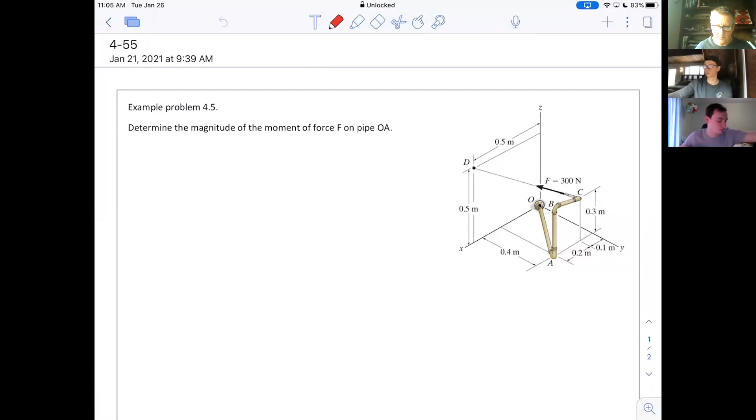So let's take a look at this, and you will see a question like this on the test. We are one week away from our first test, and I'd say this is the most practical example. I had to make this problem up myself because I didn't think there was a good one in the book.

Notice this time it's asking to determine the magnitude of the moment of the force F on pipe OA. Can you see pipe OA is attached to the wall through that floor flange? When you rotate that, it's going to cause the pipe to want to untwist, lefty loosey. You can tell the arrow's pointing left, it's going to want to unloosen it. So this time it's not the moment around a point, around point A, it's around axis OA.

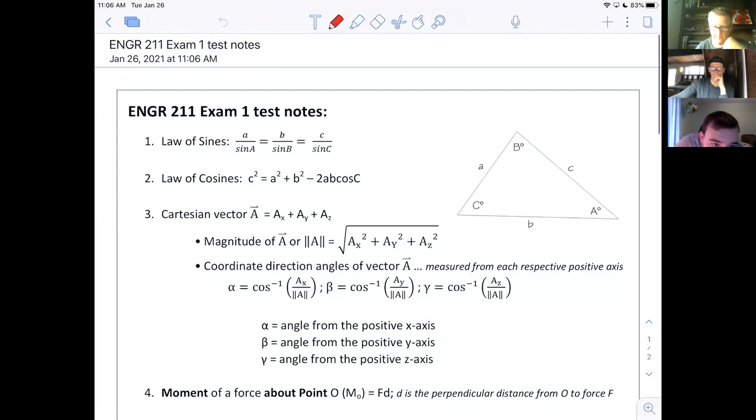Number 5 there, moment of a force around a point, that was the 4.4 assignment. But number 6 here, which is the last thing you need to know, is moment of a force around an axis. Notice the difference if you just stare at this matrix that we're taking the determinant of versus this one. What's the difference between those two matrices?

Notice the R's are the distances, unchanged, the forces are unchanged, force of X, force of Y, force of Z. The only difference is up here, we kept track of which axis it's rotating around, and our answer wasn't a number. If you're saying rotation around a point, you don't just get a number for an answer. You get the force around the X axis, the force around the Y axis, and the force around the Z axis separately.

But when you go around an axis, the only thing you're adding is these U's up here, that's the unit vector. That's actually the lengths of axis A, in other words, the unit lengths of axis A. I'll show you what I mean by that in just a second.

So what you're multiplying by this time is not just an i that keeps track of, hey, this is the one around the X axis. You're actually multiplying by a number, by a number, by a number. And notice it's still plus, minus, plus, you're still taking a determinant if you wanted to memorize this. But you're actually going to get a numerical answer, in other words, how badly does that pipe want to unrotate.

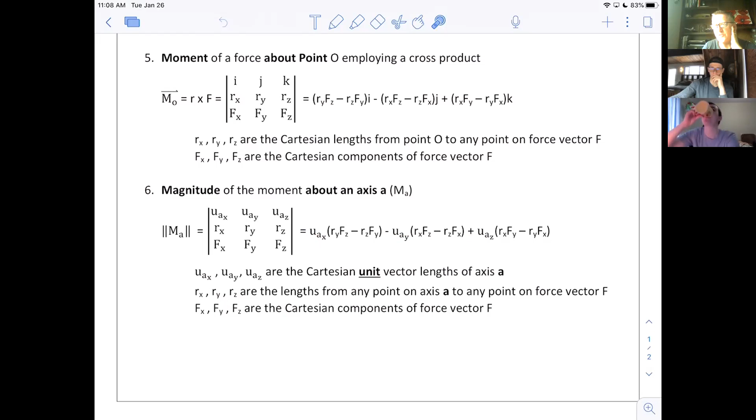So we're going to be staring at that formula. Now I've got to make that go away. So let's see if we can figure that out for this particular example.

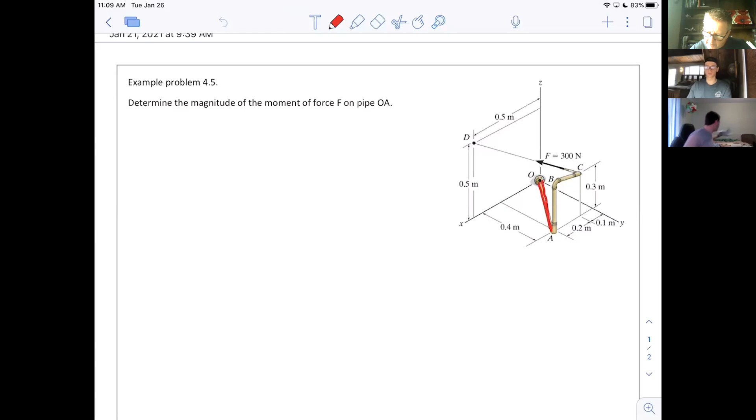So let's take a look at this axis right here. I'll color it red because we're rotating around that axis. Let's see, where is that axis? Notice it's 0.1 and 0.2 in the X direction, so it's kind of 0.3 over here in the X direction, and then it's 0.4 in the Y direction. Notice it's laying in the XY plane, so its Z is 0, there is nothing there. It's 0.3 and 0.4.

Now, in that formula I just showed you, if we multiplied by 0.3 and by 0.4, does it make sense that would actually change the size of the force? Those aren't forces, those are lengths. The reason we're converting that to a unit vector is because the length of a unit vector is 1. And therefore, when you multiply by 1, you don't change something. That's the logic as to why you're multiplying by a unit vector. And the lengths will tell us what that is.

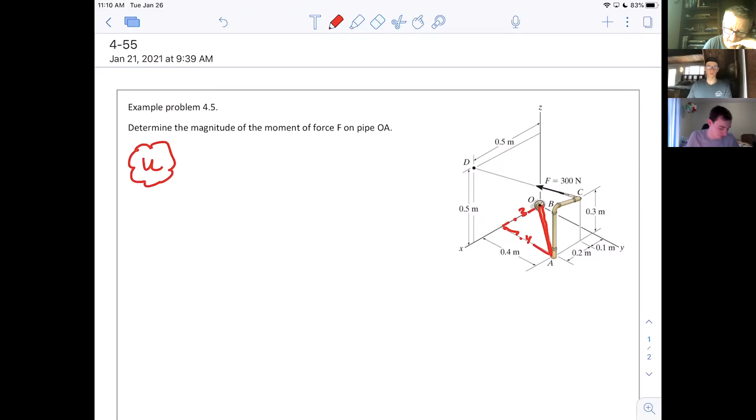So with respect to U, describing the axis of rotation. And again, please interrupt when you have questions.

Interrupt, I said. In the X direction, it's positive 0.3. And in the Y direction, that's also positive 0.4. Wait a second, how do I know that that's positive or negative? I actually got to think about that a little bit.

I'm going from O to A. I'm just trying to think, does that matter? I don't think it does. And then because it's laying in the XY plane, there's no Z at all. It's kind of flat, down there in the XY axis. Are you good with that? Does that make sense?

So if I do the Pythagorean theorem in 3D on this to see what the hypotenuse is, then of course I'm taking 0.3 squared plus 0.4 squared plus 0 squared. So I'm just sort of happy, in a sense I don't have to think of this as 3D, it's in 2D. And you may remember 3, 4, 5 is a right triangle. So this actually comes out 0.5.

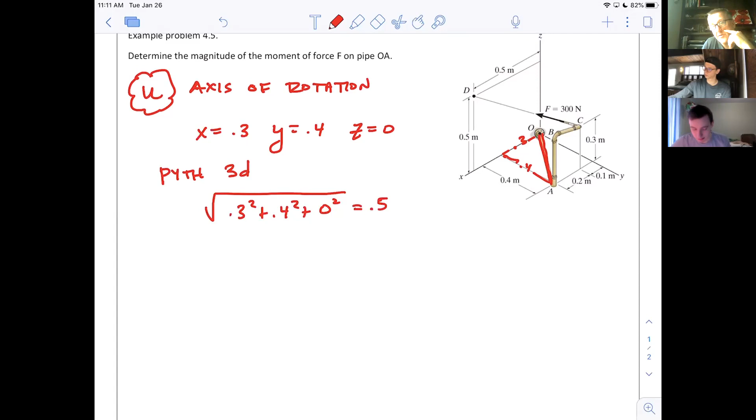So that pipe length is 0.5 meters, half of a meter long. So as I said, I wouldn't have had to do this in 3D. I just wanted to write it in 3D so you understood if there was a Z, then fine, I'll do it that way. So that means then U as a unit vector is really...

I guess I better write it this way. U of X then is 0.3 out of 0.5. We're always doing that, right? It's the X divided by the hypotenuse. In other words, that's 3/5 or 0.6, just to get rid of the decimals. So my unit vector is 3/5. And of course, my Y would be the unit in the Y direction, 0.4 divided by 0.5, which is 4/5.

And since there was no Z, there is no Z. So this is my unit vector. Now we're multiplying, we're doing the same thing we did to find the force around a point, but we're multiplying by these terms, not X, Y, and Z, or I, J, and K, like the other formula. We're multiplying this by 3/5 and 4/5.

Now, collectively, does it make sense the magnitude of that unit vector is 1? That's why we did this. So by multiplying by 1, we're effectively not changing the force. If the force is 10 pounds or whatever, or the moment is 10 foot-pounds, we don't want to multiply by 6 and make it 60. We want to multiply something that doesn't change its actual size. And so what we're really doing is taking that force and multiplying it by numbers this time instead of just by I, J, and K. That's the only difference.

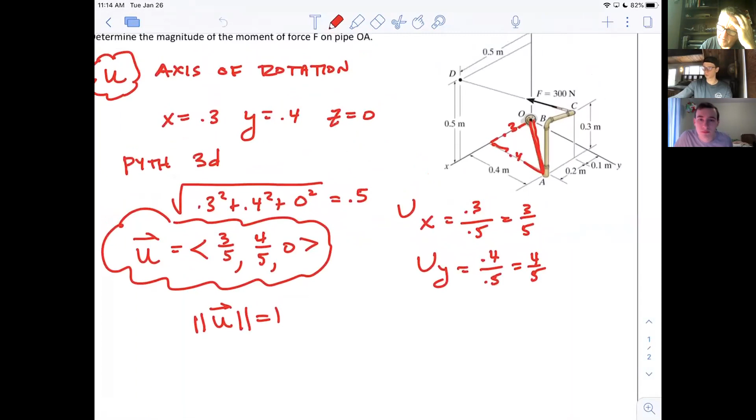So how far is it from the bar OA to that force? Would you agree that there's two places on the force that I know where I am? I know where I am at C, but notice it's also pointing at D. So I could go from O to D. I could go from O to C. I could go from A to D or A to C. Any of those would be okay according to that note. Do you agree with that?

The question is how far, all I'm really doing here is how far is it from the axis to the force?

I'm going to say O to D. Notice it's O to D, not D to O, because if you screw that up, you get the signs backwards. So O to D would work, O to C would work, A to D would work, and A to C would work, apparently.

My note sheet was very careful to say any point on OA up to any point on that force. I know a lot here, so I have all these choices. Now we could stop and think about which one's the easiest, that'd be fine. For no good reason, I'm just going to choose A to C.

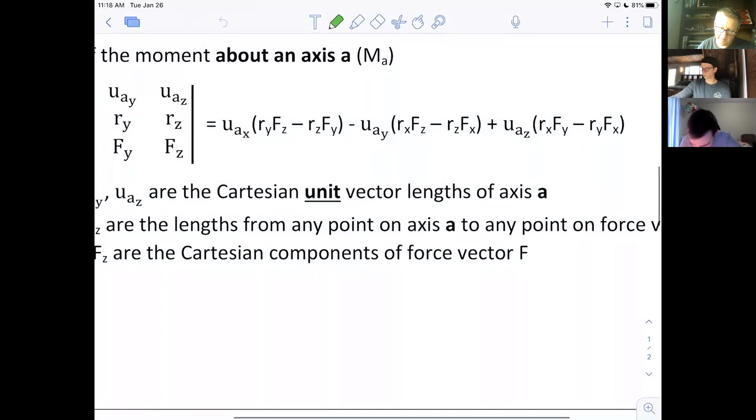Lastly, I've got to get all my forces. Let me see, how did that work again? Forces. Oh, darn. Force in the X direction, force in the Y, and force in the Z. I got to break that up myself. Cartesian components of the force. Dang.

Why do I say dang? Because in this problem, I was given 300 newtons of force, but that's not in its components. That's just pointing off in space somewhere. And so I got to break that up into its component parts. And I'm going to do that using, again, kind of the unit vector concept, a proportion.

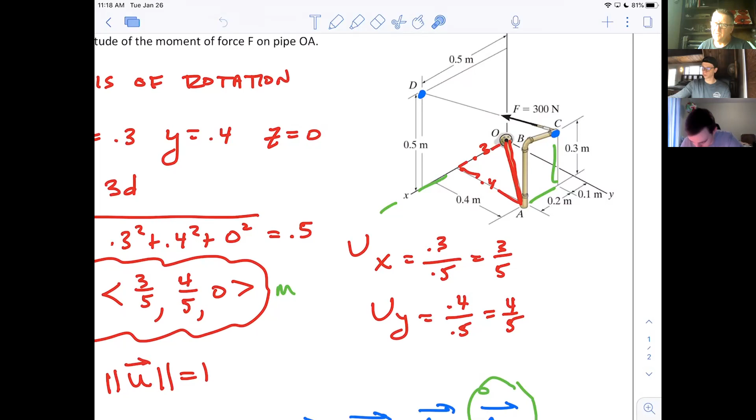So make sure you understand that force is pointing from C to D. Those dots that I made on there that were blue, very important. The force starts at C and it aims at D. And so what we got to do is come up with all the distances. How do you get from C to D? And that's not obvious, right? I mean, I got to stare at this a little bit.

This is a harder one. You got to stare at the picture. And again, you got to stay parallel to the axes. How do I get from C to D? Well, switch colors. Look at the forces.

Well, let's see, how far is it in the X? So I'm staring at very particular things right now. I'm looking at X. I'm looking for, parallel to that axis, what measurements do I have that are parallel to that axis? I'm tempted to say 0.2, but does it make sense that if I go across, that C is not 0.2 away? What do you gotta see? Somebody help us out here. What dimensions are you looking at that tell you how far this is in the X?

I find this tricky. Well, you can see that there's 0.5 meters in the X back there. So you can subtract what you see over there from what's over there. That's exactly right. So I'm at C. Where is C? C is at 0.1 meters. So you're 0.1 meters in already to C, but D is at 0.5. So you're a total of 0.4.

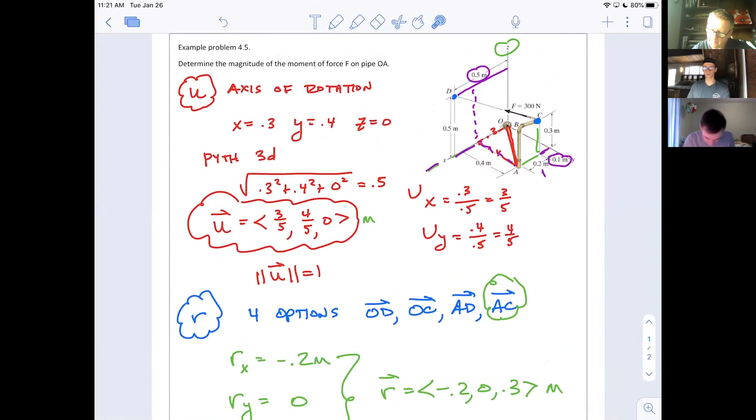Again, you got to stare at this figure a while. You got to stare at anything that's parallel to the Y axis. There's 0.4, that's parallel to the Y axis. That's the only one I see. Well, that's actually good news. It's 0.4. That's how far it is. Okay, great. It's 0.4 in the Y direction.

Is that positive or negative? Well, because it's going from C to D, that's backwards from Y. So that's negative.

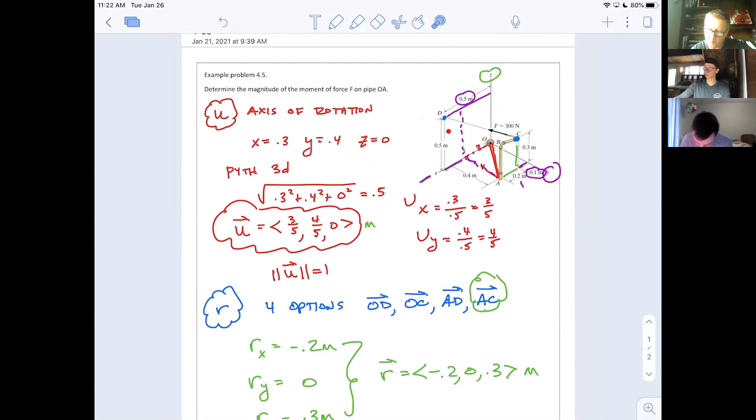And finally, Z. What is it in Z? Again, I'm looking parallel to Z. There's a 0.3 there, there's a 0.5 there. Hey, that's the only ones, 0.3 and 0.5. Well, if D is 0.5 up and C is 0.3 up, then that means the difference of those is 0.2. So it's 0.2 up. So that's positive.

Do you agree with that?

So we're using a proportion to get this. Or you might think of it as a unit vector. I've been kind of using the proportion idea. It's the same thing, but I'm going to do it as a unit vector this time. So then what is the magnitude of CD?

Well, I've got to square all of those and square root them. Notice I left the negative for Y out just because I'm afraid if I type in negative 0.4 squared, I'm going to get it wrong. So 0.4 squared plus 0.4 squared plus 0.2 squared. I got 0.36. Wow, thank you, book problem. 0.36, when I square root that, I actually get 0.6.

So that means the unit vector of CD could be written as 0.4 divided by 0.6, which would be better to write as 4/6 or even 2/3, which I'll switch in just a minute. And then I got to be careful not to lose the negative for this one, negative 0.4 over 0.6, and 0.2 over 0.6. So better would be unit vector for CD. And maybe I should be writing that over the U. Let's see, that'd be 2/3. This is negative 2/3, and this is 1/3.

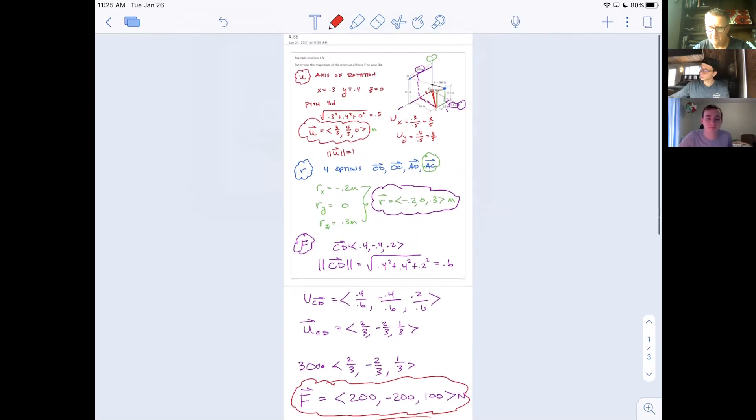I should get my 300 back. I mean, the actual force is 300, but I just broke it into its X, Y, and Z components. And so that's what the unit vector or those proportions are doing for you, is figuring out what percentage or what proportion of that 300 is going in each direction.

And I'm using the lengths that define the direction it's aiming to help me do that. So that's why unit vectors are cool, because effectively what you're doing is multiplying 300 by 1. So you're not changing the 300. You're just partitioning it out to how much in X, how much in Y, and how much in Z.

And so my first thought was, wait, that's going to add up to way more than 300. But then I forgot, oh, that's right, we got to square root it. So that's 400 plus 100, 4,000 or whatever, but oh yeah, that'd be 9. The square root of 9 is 3. Okay, yeah, that does work.

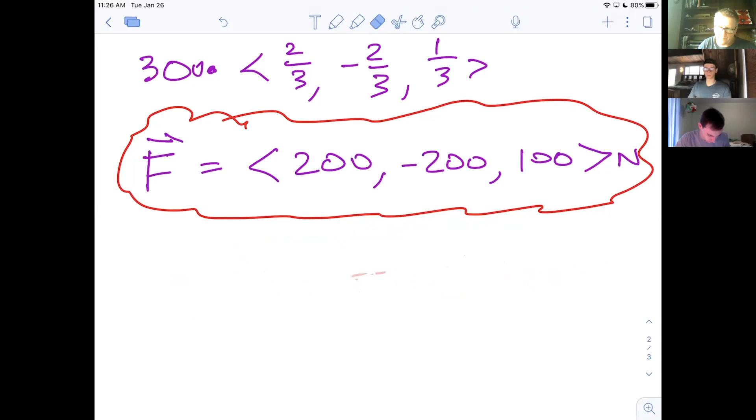So there's all my ingredients. Wow, this is time consuming. So then I can say, according to my note sheet, which I don't want to flip to, but I do want to look at, where are you?

How do I write this? Well, I'm trying to find the moment. What am I trying to find here? The moment, get bigger.

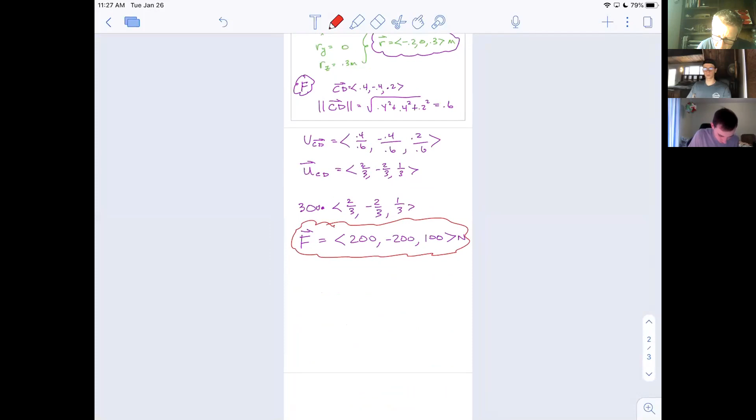The magnitude of the moment around pipe OA, or axis OA. So I'm going to write that as the magnitude of the moment around OA. It's not the magnitude around O, that would be the rotation around a point. It's around an axis, and I define the axis by those two endpoints. That's how you, in geometry, say it's like segment OA.

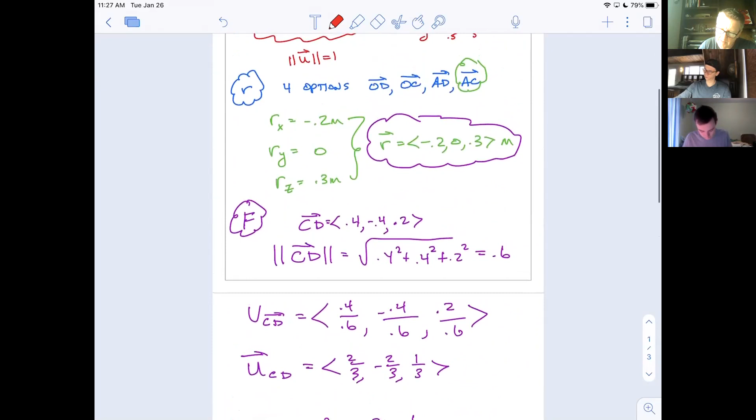And then my large and intimidating matrix is to rewrite all of those radiuses, which were 3/5, 4/5, and 0. And then all my distances, how far the axis is away from the force: negative 0.2, 0, and 0.3. And then all my forces: 200, negative 200, and 100. And then take the determinant of that matrix, and that's going to produce a number.

Now, can you at least picture what this is accomplishing? You're taking the force of 200 in the X direction, and multiplying it by how far that force is perpendicular away from our axis. All this is forces times distances. That's all it is, just a bunch of them - there's a ton of them. That's the problem.

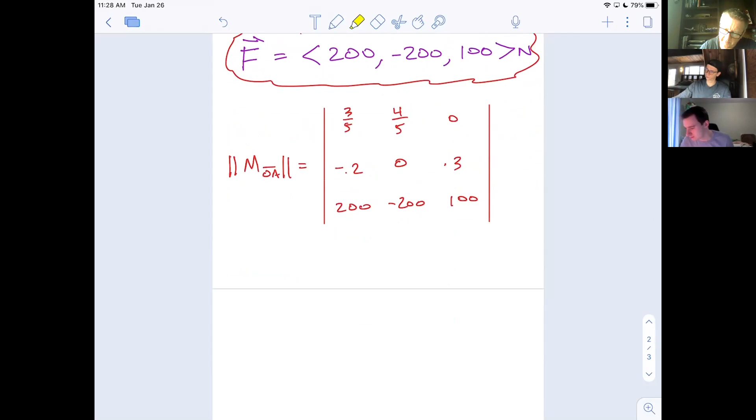So let's use our mnemonic device. I'm taking this row and this column out, which means I'm taking 3/5 this time, times the diagonal multiplication, 0, always minus, and then 0.3 times negative 200. Notice how easy it would be to screw up the signs there. It's actually minus a minus, so that's going to be a plus. That takes care of that one.

Next, 4/5. What's important to remember about the 4/5? That's on my note sheet, but if you're memorizing this, what's important about the 4/5? Negative - you change the sign of it. Again, I'm coming back and crossing out this row and this column this time. So that leaves 4/5 times...

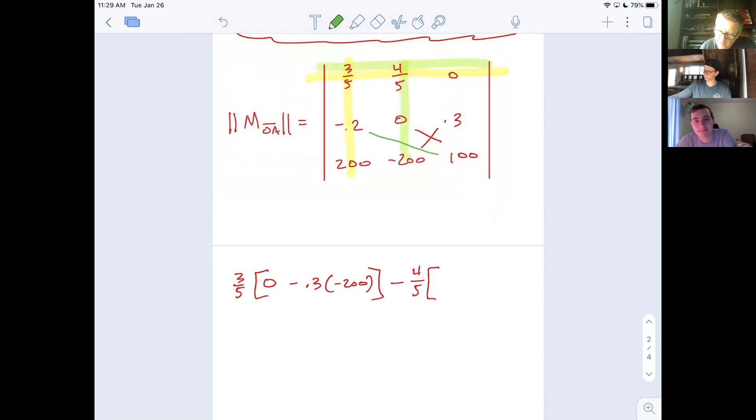Let's switch colors just because this is going to get confusing. So I'm multiplying negative 0.2 times 100. It's always minus, and then 0.3 times 200. And then back to plus, and then, oh, cool, force Z is 0. So I don't care what's sitting in there. That'll save me some time.

So just to make sure I don't screw up, I'm going to go a little slower. Let's see, 0.3 times 200, that's a negative, and a negative, that's a positive, so that'd be 60. And then minus 4/5 times - this is a little worse, I'll type everything in so I don't screw it up - negative 0.2 times 100. I know I can do that in my head. Minus 0.3 times 200. I got negative 80 for that. But I'm also staring at my calculator to make sure I actually typed what it said. It looks like I did, negative.

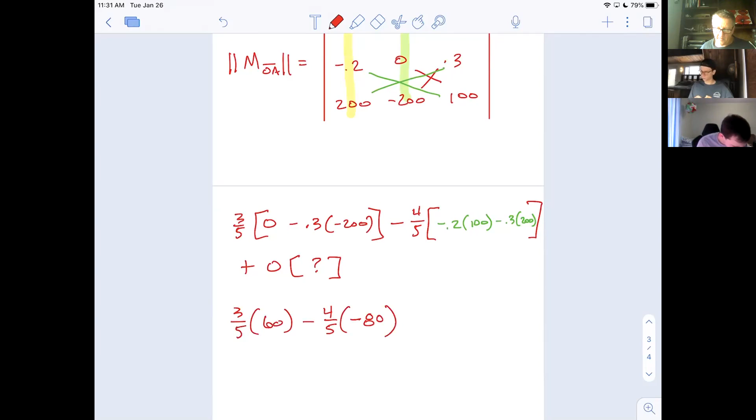So now I can actually multiply that out and answer it. I'll do this in my head. 60 divided by 5 is 12. 3 times 12 is 36. 80 divided by 5 is 14. 14 times 4 is 56. I probably shouldn't trust myself. That's 16 - it's a good thing I didn't trust myself. 80 divided by 5 is 16. Times 4 is 64.

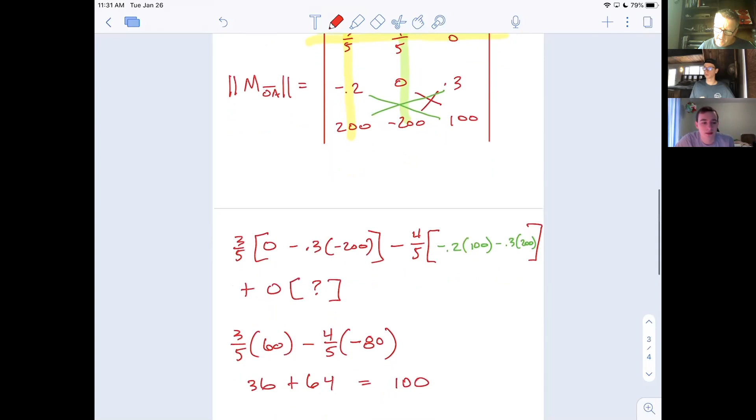So that just came out 100. What were my units? I was a little footloose and fancy free about that. What were my units? It'll be Newton meters, because our forces were newtons and our distances were meters.

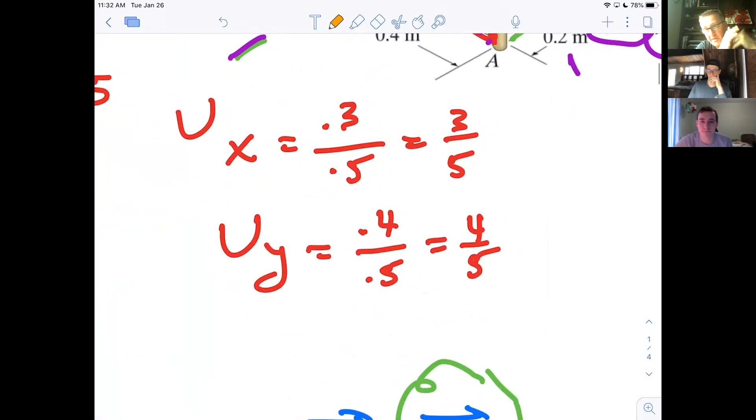Is anybody bothered by this? Isn't the unit for this row meters, and this row meters, and this row newtons? So wouldn't it be meter newtons? Well, that first row is a unit vector, right? So I think the meters cancel out there. Good job, because when you look back here, wasn't it 0.3 meters divided by 0.5 meters? So the meters actually cancel. So that top row is actually unitless - that's what a unit vector is really doing, it's cleansing it of everything.

So if you are bothered by it, no - it's really nothing times meters times newtons, so it is Newton meters if you follow the units through it. So now you can say that's how badly the pipe wants to turn. Does it make sense that now you can kind of know, is that going to turn? Is it not going to turn? Is that enough force?

You see how you've got to lean on that mnemonic device to get this right? Three dimensions, this is really one of the biggest things you need to be able to do, because it's hard. Real life is in three dimensions, and you've got to know the resultant. I think the end of this chapter will really help this all come together for you.

We don't have to learn anything new from now on. We're just applying this to interesting questions. So that's the good news. You're done, the note sheet is ended. There's nothing else for me to teach you. We just get to apply and practice and strengthen our grasp of this.

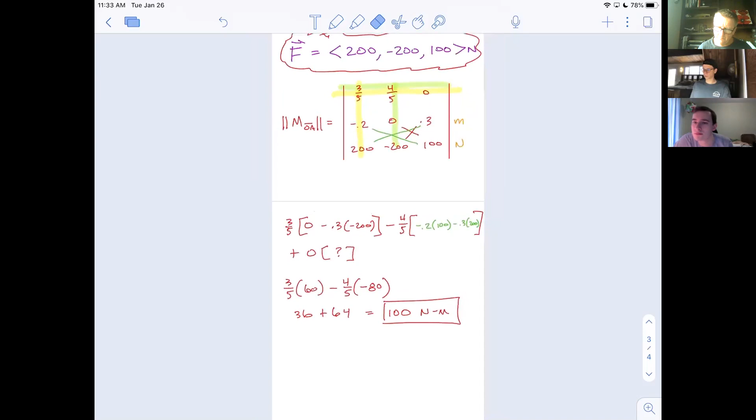Anything bugging you about that before we go on? Really? No?

Let me just quickly show you where we are going from here, with a couple of cool pictures that I stole off the internet from somewhere, that I think illustrate what's going on here.

Check out these cool home designs. I'll just stick with that top one right there. Isn't that cool? Like, wow, that's awesome, man. Would you like to live in something like that? They've got this front porch out there that sticks out, so you can stand out there, and it's obviously up in the mountains and you're over the top of something.

But can you see what we've been talking about here? They've got this whole building cantilevered out. Can you see that it wants to do two things? It wants to fall because of gravity, and you can see the pipes are there pushing up to counteract that. So the force down is counteracted with the pipes pushing up, so it isn't moving. Good job, engineer. Statics — you made it not move.

But the building is also attached back here. Does it make sense? It also wants to rotate — it wants to sort of cave in this way. So I've got to track both of those things. In this picture right here, can you tell that the building wants to rotate along that axis right there, that axis of concrete that's holding it up? That's what it wants to rotate around.

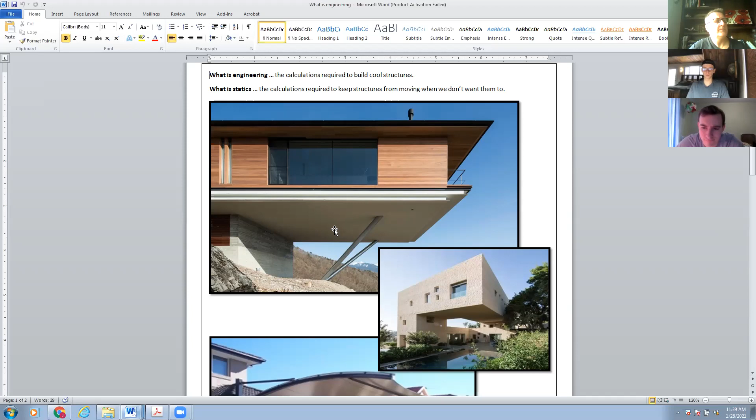Can you see this one down here is even cooler? Because it doesn't even have any supports. So you might wonder, wow, how in the world? I would have thought there'd be like a post over here holding that whole thing up.

Can you see it here? This awning wants to rotate downward along this axis and fall on that car, but up here is a connecting rod pulling back, keeping that from happening. So that's why you've got to calculate moment around an axis — and it usually is around an axis, not a point. So that last problem I just did, I think, is pretty key.

How's your brain? Is it okay? Smoking?

I think Aaliyah's audio wasn't working, so that's why she was leaving and coming back. I guess she's not here now. Got it, okay.

Thanks for pointing that out, because I'm not always going to see the chat since I'm busy rambling.

Let's see. What do I want to show you next?

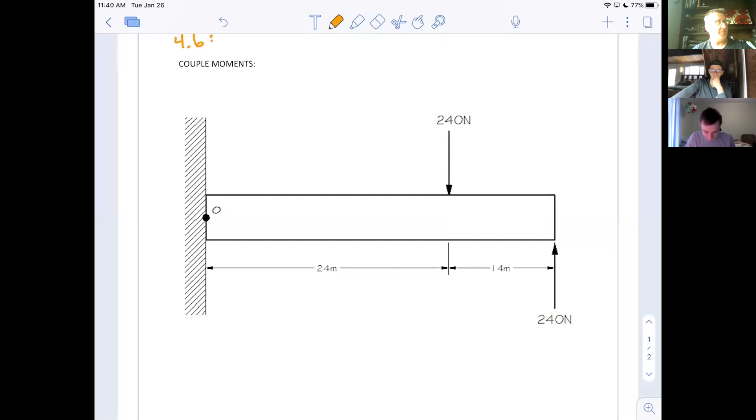So let's stare at this. Only an engineer would come up with a name like couple moments for this. This is why we get teased. If you looked online at engineering memes, they're all negative, poking fun at us for being nerds, which is kind of true, but we also make the world go round. Couple moment, man, how in the world did you get that into an engineering class?

Well, watch this in action. This is really the idea here. You don't need to learn anything new or even this terminology to understand the logic. But let's go figure out the moment around O. You should be able to do that right now. Super easy—notice all of the distances are given and the forces are perpendicular to them.

You don't need a matrix and a determinant to figure this out. You can just do it with pure force times distance. Remember the convention: going this direction we're calling positive, and going this direction we're calling negative. I just want you to find the sum of the moments. Well, you should say that's super easy.

I would take this 240 times its distance. Again, notice that's perpendicular—that force extends down here, that distance extends right there. Those are already perpendicular, so I don't even have to convert 240 to its X and Y coordinates. So 240 times its distance of 24 meters. Maybe I won't be lazy—I'll write 240 newtons times 24 meters. And again, the convention is that's negative, so I'll throw a negative in front of it.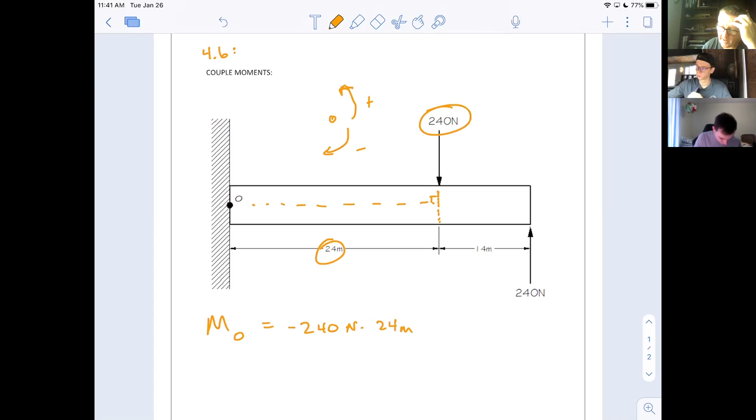So we got that. But then notice this is the exact same force—that's why this is called a couple moment. Those two forces are exactly the same, and I'll talk about that in a minute. That would be causing counterclockwise rotation, so that's actually positive. So it's also 240, times distance, but it's further away—it's 24 plus 14, 38 meters.

You should think, yeah, this is totally easy. There's nothing new here—this is the easiest problem we've done. If you don't blow that, you get 3360.

And again, what that means is desire to rotate. So because of these forces, that beam wants to rotate in the positive direction. The forces were working against each other, but it wants to rotate around O in the positive direction—3,360 Newton meters. And again, we can't stop there. We got to stop that from happening as an engineer, but the whole key is finding the resultant.

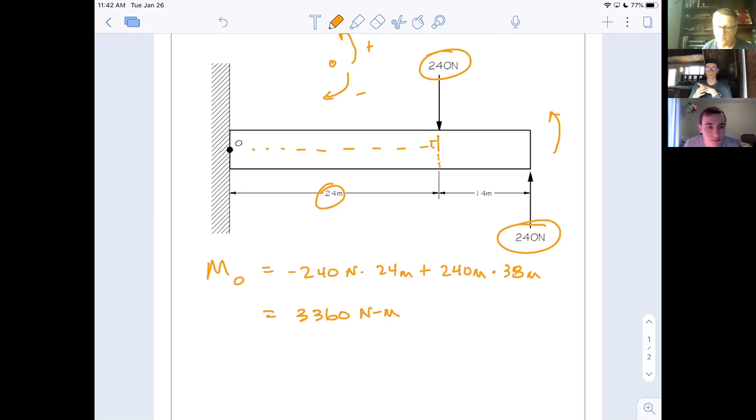What I'd like you to do now is redo this problem, except let's do it around this point here, point B, which we'll put perfectly in the center, 7 and 7. Recalculate this moment around B. What do you get now?

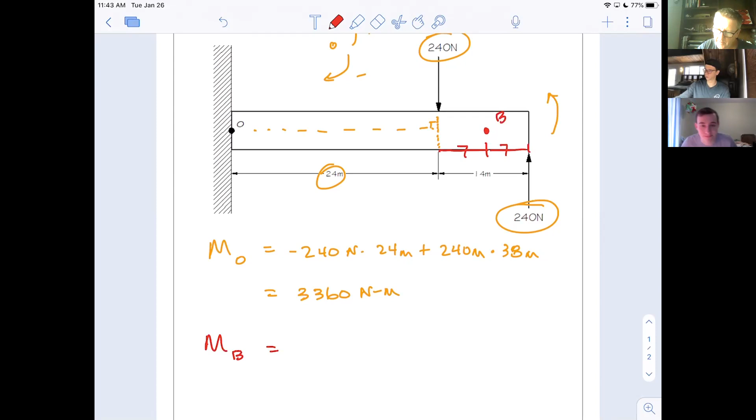Let's see, you get the same 240, a distance of 7, causing positive rotation. So 240 newtons times 7 meters, positive rotation. And then if you come over to this other one, isn't that also causing positive rotation? They're both positive—that's interesting. So then it's 240 newtons times 7 meters again. What do you get? You get the exact same answer. Is that a coincidence?

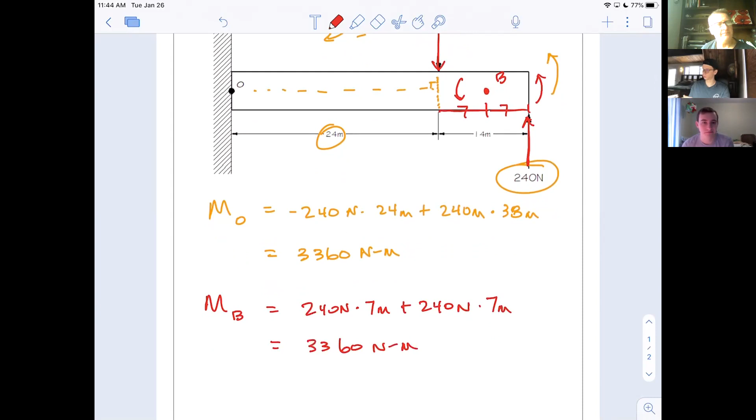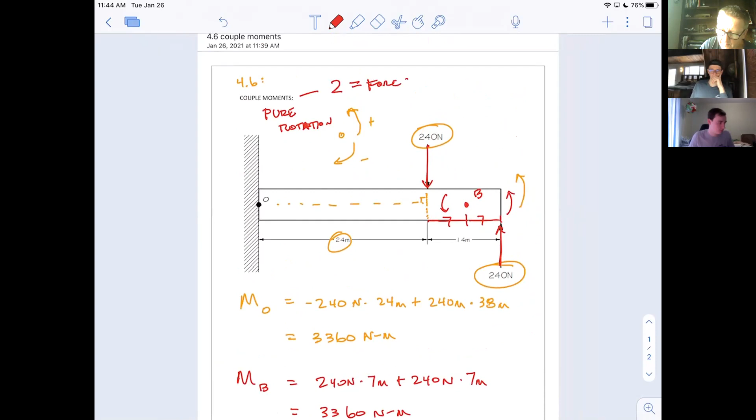The answer is no. Sometimes couple moments are sort of called pure rotation—kind of making that language up, but it actually doesn't make any difference. A couple moment is defined as two equal forces parallel to each other. Notice that's happening here: they're both pushing parallel to each other and they're the exact same force. That causes pure rotation. You want to think about that like an airplane propeller—it's just spinning around a point.

If you grabbed one of the illustrations in your book, it's like grabbing a wheel, not a car wheel, but like a wheel that opens a gate. You grab it with two hands and push up with one hand and pull down with the other simultaneously, and because they're your arms, you have the same amount of force.

So you're pushing up with 10 pounds and pulling down with 10 pounds, turning it simultaneously, and it wants to rotate around point B, around the center. In this case, no matter what point you pick—we started with O, the natural point because of the picture—it actually doesn't make any difference. As an ultimate shortcut, you don't really need to know this for the problems we're doing, but this is why it's in the book.

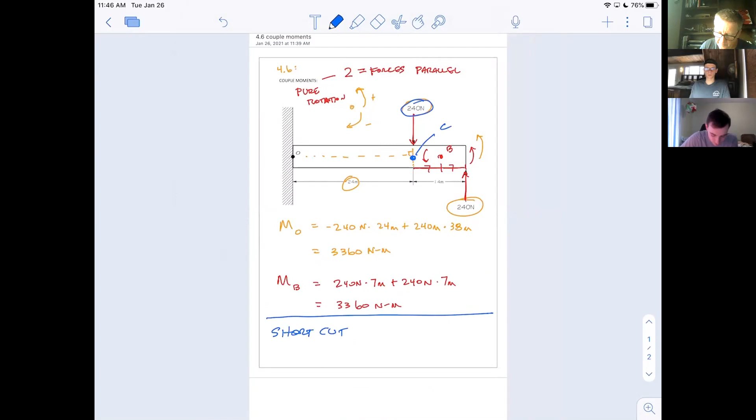As a shortcut, you could think of it as putting the point right there, point C. This 240 right here would produce no rotation at all because it's pointing right at the point, and then the other one would be all of it. So it'd be 240 Newtons times 14 meters, which is still 3360 Newton meters—the same answer no matter what you get. So as a shortcut, if it's a couple moment, you can just take the force times the distance, and that's not written very clearly, but it's the same exact force.

So just write it down once, not twice, and then figure out the distance between them. Do you see what I'm saying? Because it doesn't make any difference what point you pick, you're going to get 3360 anyway.

Let's try to do this question really quick out of the book. This would have been one of your assignment questions, but now you're not doing any questions out of 4.6, so let's just do this one quickly using that cool shortcut.

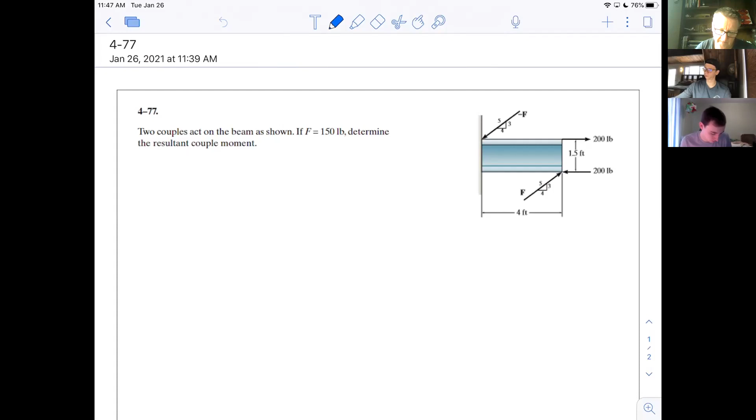Notice it says two couples act on the beam. Do you agree that's actually happening? They're telling us this is 150 and this is also 150. Do you agree the two forces are parallel and pushing in opposite directions of each other? I didn't add that to the notes before. So 200 is doing that, but then 150 is also parallel—now at an angle, so that's a little more complicated.

I'm going to use this shortcut to figure out the resultant moment. So when they say couple, it just means, oh, cool shortcut—you don't need to know anything new to get this right. Notice it doesn't say determine the resultant moment around point O, because these are parallel and opposite to each other, it doesn't matter what point you pick. You can pick any point you want.

If I gave you this problem on a test before I taught you this, you wouldn't have known what to do, because you would have said, well, which point do I pick? Do I pick this point to rotate around, or that point right there? And the answer is it wouldn't have mattered. That's what you just learned—it doesn't make any difference.

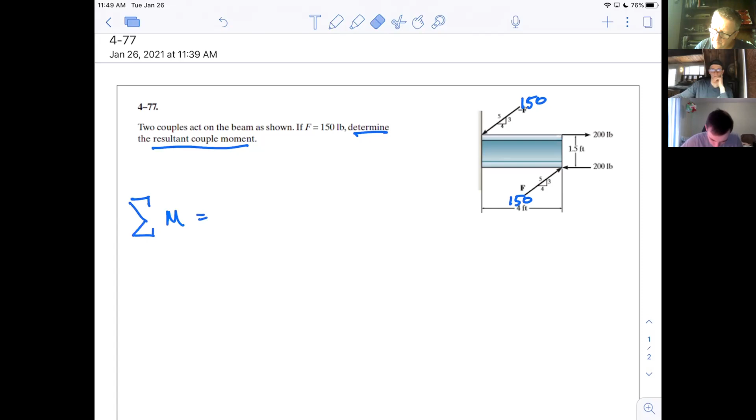Clockwise rotation, so that'd be negative 200, and I'll be lazy this time and write times 1.5. I see that it's foot-pounds, so I need to include that, but I'll leave that off for now. So that takes care of all that—I'm done with both of those. I don't even care what point it's rotating around. Do you see the shortcut in action there? That's why this is in the book.

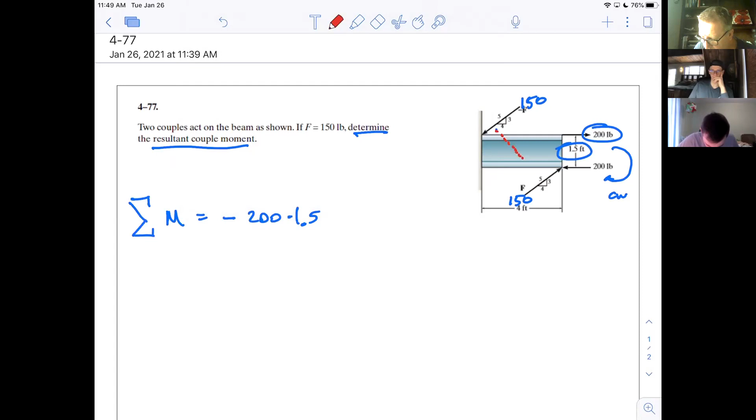Now the other one's a little more complicated—does it make sense that we don't know what that distance right there is?

Now the question is, what could we do if we wanted to figure it out? But easier would be to do what we've been doing, which is to break these into their components.

So if I split that up, exactly what we just studied a minute ago, and I covered up the 5 there, would you agree that 3/5 of 150, not 1,500 - let's see, a fifth of 150 is 30, that'd be 90 pounds are vertical there?

You agree with that? And then over here, wouldn't it be exactly the same, also 90 pounds? And would you agree that that's causing counterclockwise rotation, which is positive? So that's plus 90. How far apart are those two forces? Does it make sense, can you see how far apart those are?

So rather than find a weird distance, I found a weird force. And now those are 4 feet apart, so I can say times 4 feet. Do you agree with that?

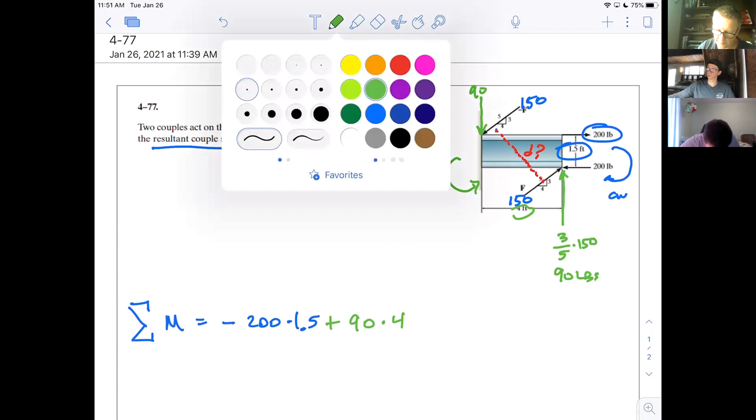And then lastly, let's see, what color haven't I used? How about purple? Lastly, I've got this purple force right here. Wouldn't it be 4/5 of 150? Which would be 120. And wouldn't this one over here also be 120?

And so notice those are parallel to each other, and in this case, I know they're distance apart. They're also 1.5. They're also trying to create counterclockwise rotation, so that means we're calling them positive. So it'd be plus a force of 120 times the distance they are apart, 1.5. That's the sum of all the moments.

That's a cool shortcut, around any point. That's why I didn't say around point O. So you could have gotten this right before this section had I just said find the resultant moment around point O, and I stuck a point O in there, and you would have got it right, but you never would have noticed - it didn't even matter what point I chose. That's the idea in this section.

So let's see, negative 200 times 1.5 plus 90 times 4 plus 120 times 1.5. I add all that up and I got 240. I got positive 240. Now I'll stop being lazy and say foot-pounds.

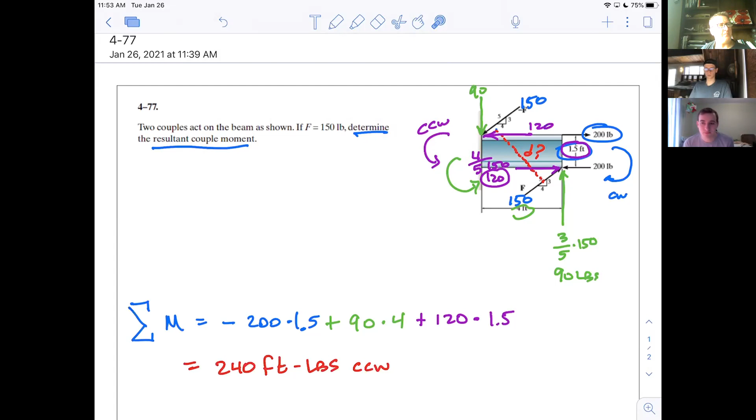You will not see a question like this on the test, but at least you've seen it.

So this is the kind of question you're going to see on the test. Now, would you agree at a glance this is not a couple moment? Do you see forces that are the same, pushing against each other, parallel? I don't see that here.

You see that occasionally, and then you got a shortcut. But, you know, this is just forces rotating and so forth. Now, you don't need to know anything new to do this problem. Replace the forces acting on the cantilevered beam.

Cantilever means it's sticking out, so it's actually attached to the wall. By the way, this is a common symbol for a solid wall - it could be concrete or whatever, but the beam is attached over there.

I see that the beam is 6 feet, 4 feet, 2 feet. It's 12 feet long and it's 1 foot thick. And so it's attached over here in some way - glued to the wall, bolted, I don't know.

But it's got 40 pushing down, which of course wants it to rotate in this direction. It's got 52 pushing down at a weird angle, causing it to want to rotate in the clockwise direction. But then 60 is pushing back up. And so the question is: is this static? Like, did you design your cool cantilevered house so that it's static?

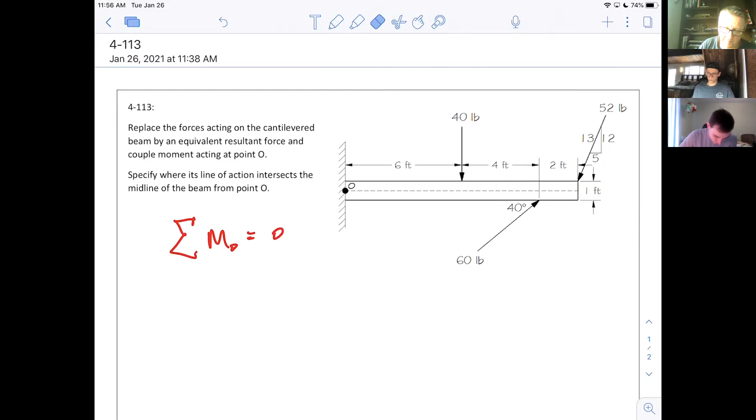So this is really what 4.7 and 4.8 are about. And we're really going to spend the rest of today and all of Thursday talking about this. So let's just dive in.

Sum number 1. The sum of the forces in Y. I'd like to give you a little bit of time to see if you can get this first. So this will be the only problem we do today. We'll finish this problem and we'll be done.

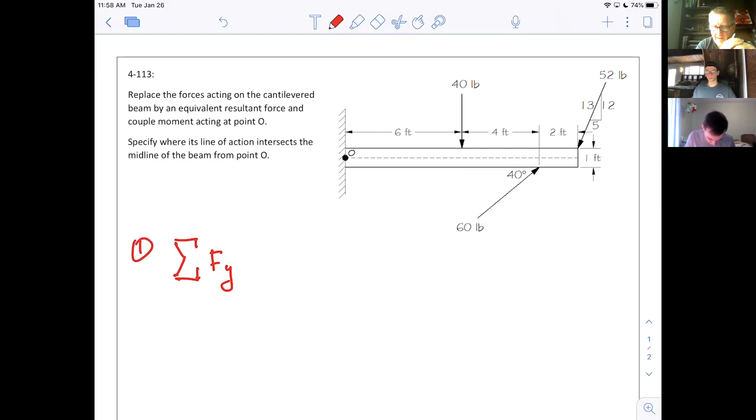Let's see if I already did it someplace. So there's 3 things we got to deal with here: the sum of the forces in X, the sum of the forces in Y. Notice we don't need the sum of the forces in Z because this is a 2-dimensional drawing. And we need the sum of the moments. We just got to look at what all of that amounts to. So let's see, that seems pretty straightforward.

I see 40 going down. That's pretty obvious. What about 60? Are you super clear now that you can't just say plus 60? Because what you've got to do is break 60 into its component parts.

So 60 is really this hypotenuse. So since this force in Y over here, I'm going to call this point A, so that way I can say force at A in the Y direction. I can't say force of Y because I've already used that someplace else. But couldn't you say, the sine of 40 degrees is opposite, which is force of A in the Y direction divided by 60. So if I take 60 times the sine of 40, I get 38.567. So I'll call it 38.57.

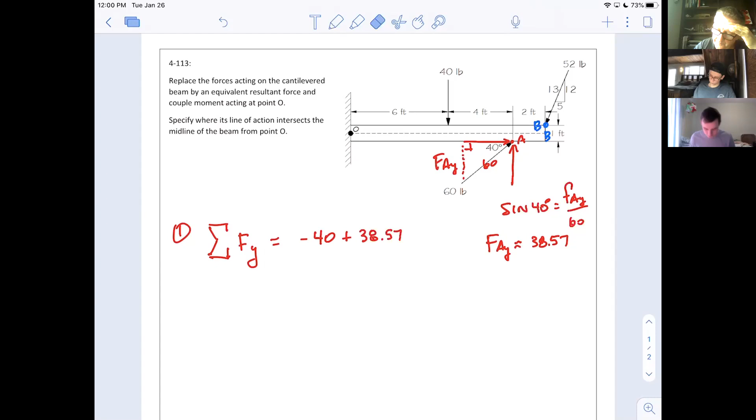And then don't I do the same thing over here? Switch to blue. If I call this point B, let's put it over there. Notice this is easier. Do you see it is easier that you were given the angle not as a degree, but as a ratio? Took me a while before I agreed with that statement that it's actually easier. So if I say force of B in the Y direction, because of these proportions, it's 12/13 in the Y direction.

So the force of B in the Y direction is 12/13 of whatever the force is. Oh, it's 52 pounds. 52 divided by 13 is 4. 4 times 12 is 48. So that's why I picked 52, by the way, because it came out nice. And that's down, so that's actually negative.

So there's my sum of forces in the Y direction: negative 40 plus 38.57 minus 48. Notice it is not equal to 0. Rather, negative 49. Do you agree as an engineer that's not good? Ultimately, we want that to be 0. What this tells us is the beam is falling, unless you come up with something to stop that.

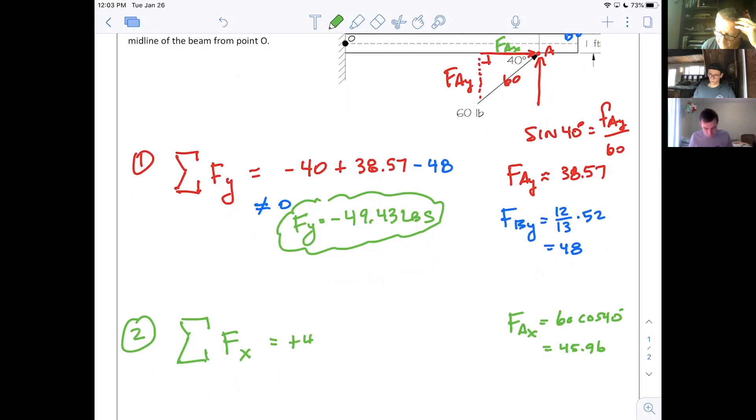Notice carefully where I'm drawing these arrowheads so that you're making this work. The arrowheads are always pointing at the same point. That's where these forces are acting, at point B.

And so that'd be 5/13 of 52. So force of B in the X direction is 5/13 times 52, which is 20.

And again, it's the picture that tells us that's actually negative. So again, not equal to 0 yet. So the force in X total is positive 25.96 pounds.

So I just took these three complicated forces pushing every which direction. When there's lots of forces acting on something, you got forces going everywhere. And I just reduced them all. I can throw all those forces away now and just say, oh, there's only two. Here's the vertical, here's the horizontal. Isn't that what we've been studying already? That's not new.

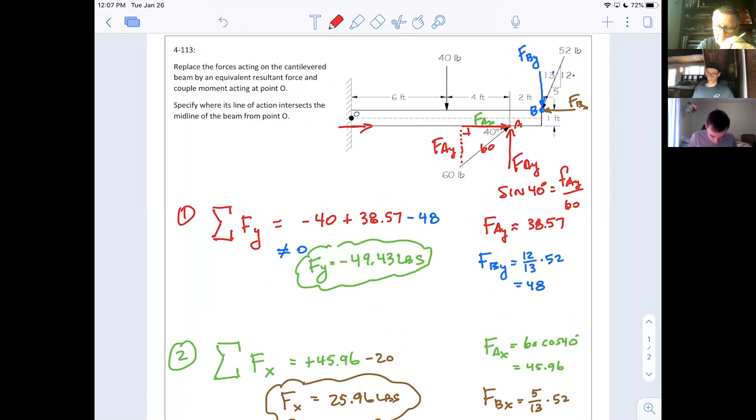And notice the same is true for the force of BX, like it's acting in this line. So if I move it over here, both of those forces have a perpendicular distance of 1/2 foot. So every one of those 5 forces up there are all going to have a distance. They're all a distance away from O. Nothing is pointing straight at O. So all 5 of them are going to count in the sum of the moments here.

So let's get rolling. So I've got 40 pounds. Notice perpendicular to 6, super easy. 40 pounds, 6 feet, easy.

Is that positive or negative rotation? Staring at the picture, you should see it as pushing it around in this direction. So that's causing clockwise rotation, which we call negative. Again, you cannot afford to get that wrong. Great, there's one.

And while we're at it, isn't the force of B in the Y direction also causing that same rotation? Except notice it's further away, 6 feet, 4 feet, 2 feet. It's 12 feet away.

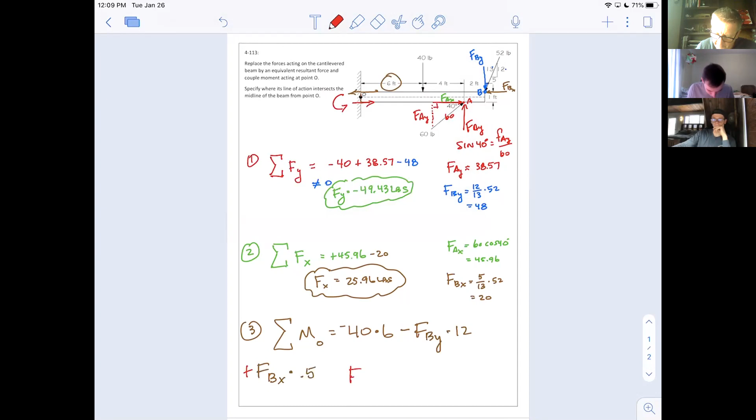Now I'm down to A. Let's keep going. So I've got the force of A in the X direction, also a distance of 1/2 of a foot. Notice, at least the picture shows, it's a couple moments. In other words, that brown and red force are both causing counterclockwise rotation. Now it's not a couple because they're not the same size, but they're both causing it to want to rotate positively. So that means this is also positive.

And then finally, lastly, force of AY, right here, pushing straight up, a distance of 10 feet away. That's causing also counterclockwise rotation. Do you see that?

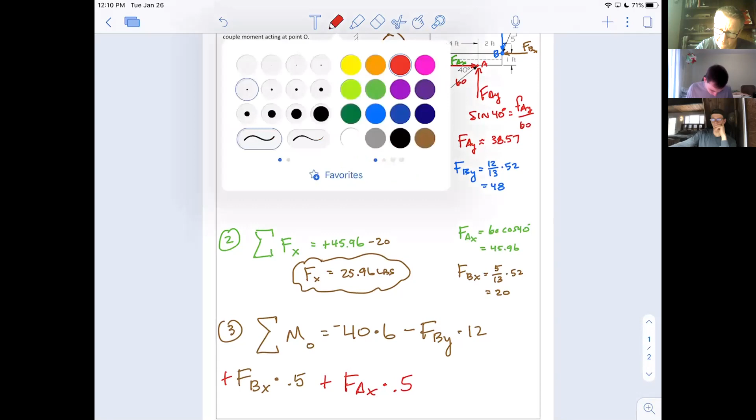All those added together, again, if they add up to zero, then we say great, that thing isn't wanting to rotate. Awesome.

So let's see, 40. I think I'll not rewrite all that, I'm going to go back and throw those numbers in. So what was the force of B in the Y direction? That was 48. And by the way, this is kind of a cool way to do this, like on a test or something, because you can still see the force of BY and it makes you slow down.

But you're going to get these wrong just because there's so much going on. So it's really important as an engineer to learn how to think slowly and systematically. Notice it's turning out to sort of save my neck that I actually labeled this so carefully. I called it point A and point B, and I was able to call each of the forces force of A and Y, force of A and X, and so forth.

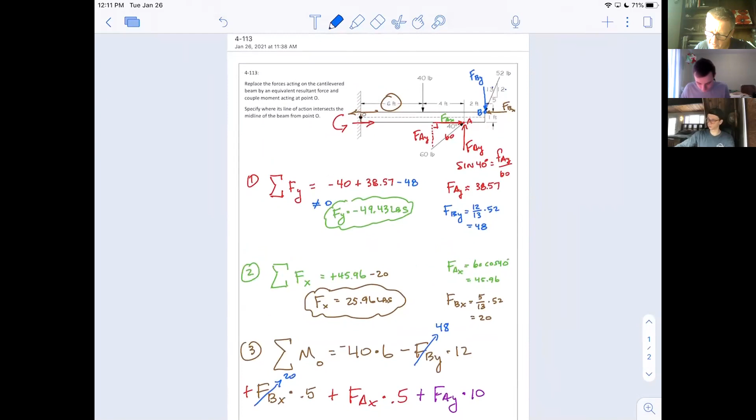That's probably going to keep me from making a stupid mistake here. So now I'm just going to go back and replace all these forces. What was the force of B in X? That was 20. And the force of A in the X direction, I'm looking back at all my notes. There it is, 45.96. It was labeled so carefully that I can see it, 45.96. And force of A in the Y direction, there it is in red, 38.57.

Now I can just plug and chug. Be very careful. I love graphing calculators because I can see every number I type, so I can make sure that I'm typing what it actually says. Minus 48 times 12 plus

20 times 0.5. By the way, have you seen the convention that some people use? They don't just say .5, they say 0.5. Do you understand why people do that? Why do people say 0.5, why do books always say 0.5, not just .5? You don't lose the decimal place. Exactly, so you don't lose the decimal place.

So plus 20 times 0.5 plus 45.96 times 0.5, and finally plus 38.57 times 10. If I didn't screw up, I got negative 397.32, and all of my units were pounds times feet, so this is foot-pounds or pound-feet. Doesn't really make any difference.

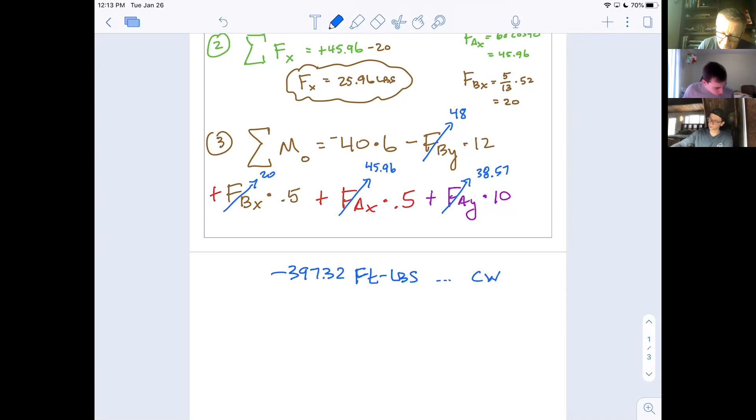Would you agree I have successfully reduced all three of these forces and kind of simplified it so that now I know how badly it wants to rotate, and I know how badly it wants to fall down, so translate vertically, and I know how badly it wants to translate horizontally. So it wants to go down with 49 pounds, it wants to move right, it's being pulled away from the wall 26 pounds, and it wants to rotate almost 400 foot-pounds. So I know the result of this.

And now as an engineer, you can go on and stop that. Now, what did this question ask? Am I done?

Replace the forces acting on the cantilevered beam by an equivalent resultant force and couple moment, acting at point O. Specify where its line of action intersects the midline of the beam from point O. What?

So this is where it gets really cool. Not only do we figure out all these forces, but we can actually figure out where they're acting. So, where are they acting? What does that mean? Well,

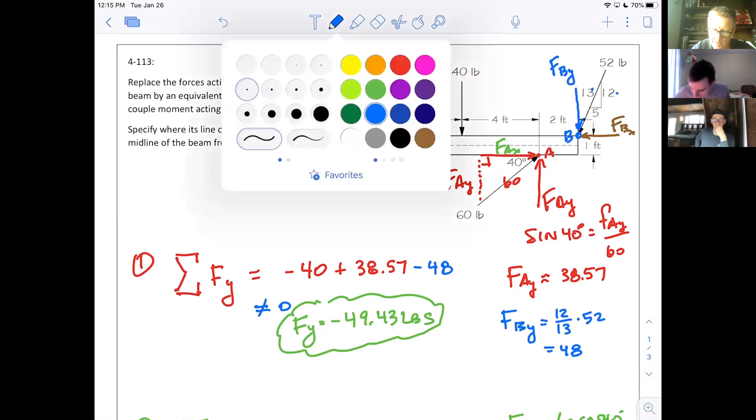Better switch to a color we have not used. Let's switch to black. So in one sense, we're done, like we figured out a lot of stuff, but let me just show you something even sort of cooler. You can actually figure out where this is acting. In other words, where is it actually behaving? Right now I'm guessing, I have no idea where this is. And so I'm going to pretend it's acting right there, and I'll call that point R for resultant.

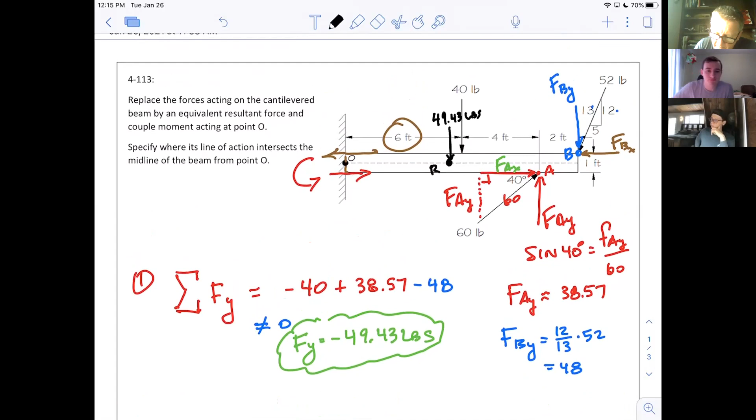Now, would you agree that as a result of what we just figured out, that at that point right there, we just saw it was 49.43 going down? You agree with that? And secondly, that it was pulling right at 25.96, which I think I will.

Dang it, what are you doing? I'm going to move that down a little bit. So I'm going to choose to draw the arrow on the left side pushing as opposed to over here pulling. It doesn't make any difference, but I'm just writing it over there. So that's 25.96.

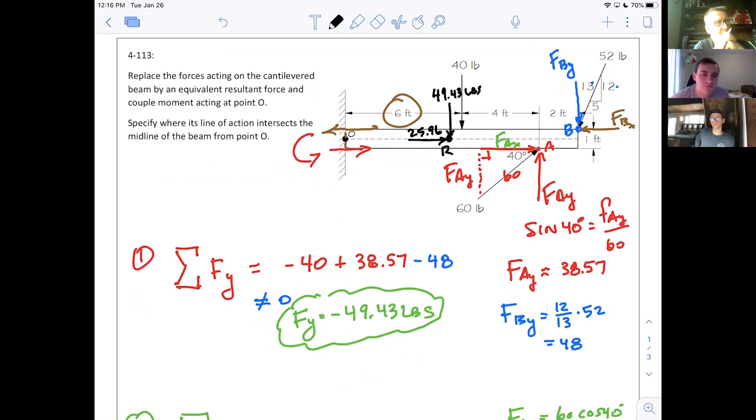And again, I don't exactly know where that is. I don't know if that's where it is, but watch this. How could I figure out where it is? I'm going to give you a second to think about that. How could I figure out where that is? How could I use that rotational answer right there?

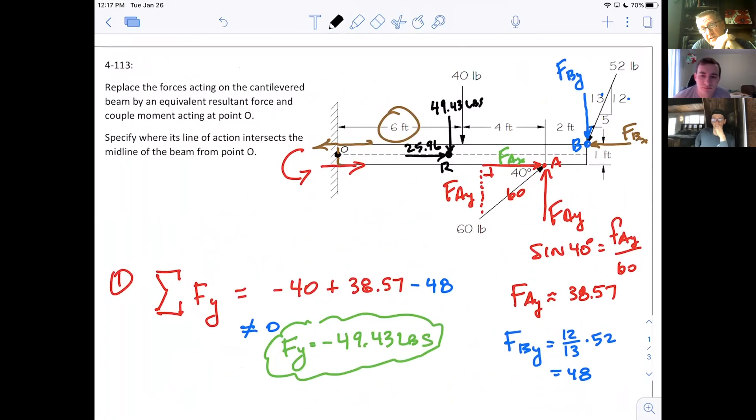Now, what I've done is I've reduced all three of these forces. The forces are all gone, and the only thing left is this black force now. Yet, isn't the rotational moment still conserved? Like, isn't it still got to be 400, negative 400? How could I use that?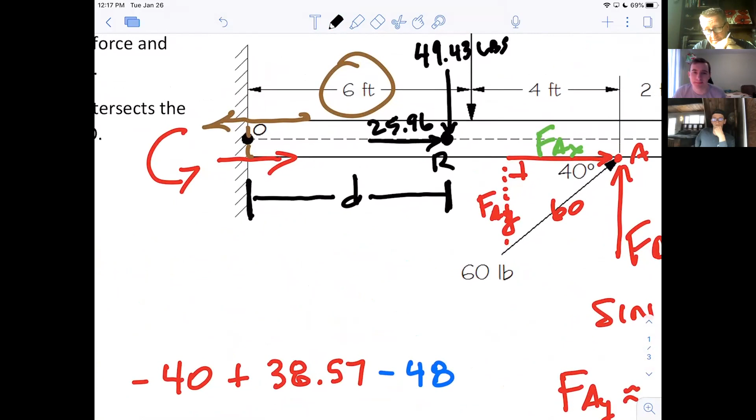However, the 49.43 is. So would you agree that it must be true that 49.43 times that distance D has to be the entire rotation? Do you agree with that? And by the way, that force is downward, so I should call it negative 49.

So if I take 397.32 and divide by 49.43, I get a distance of 8.04. D is 8.04 feet.

That's where it's located. So by considering not just the vertical desire to move up and down and the horizontal desire to move, and also the desire, by considering all of them together, I can actually see where that force is actually acting. So I just got rid of all three forces and replaced them with just one force, and I know where it's acting.

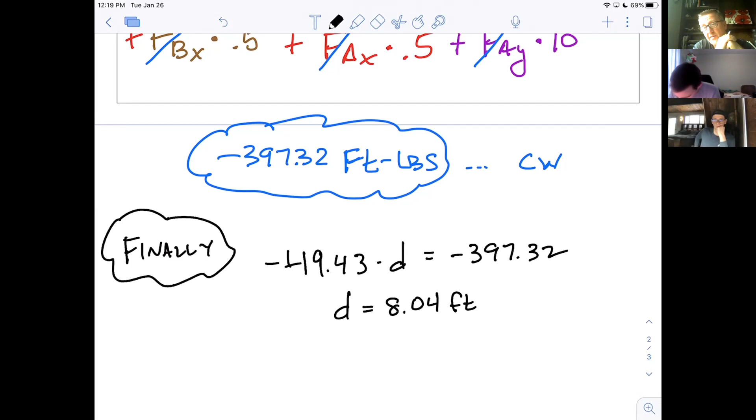So is my picture correct? Was my guess correct as to where this is located? Notice the 6 feet right there. No, it's 8 feet. So my location isn't good.

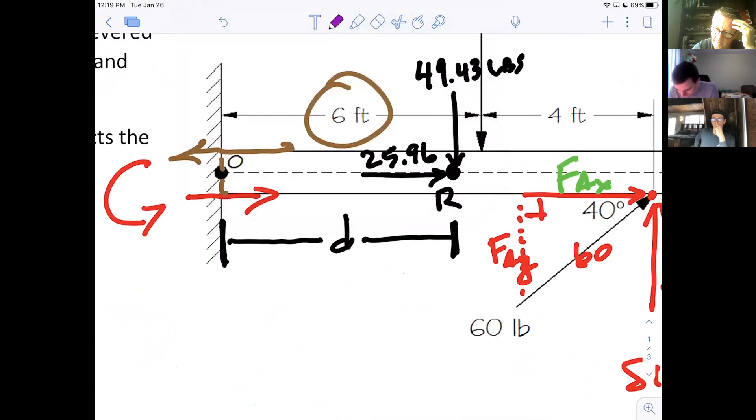So I won't erase that. I'll just say kind of actually let's say R is actually here, 8 feet, be right in there somewhere.

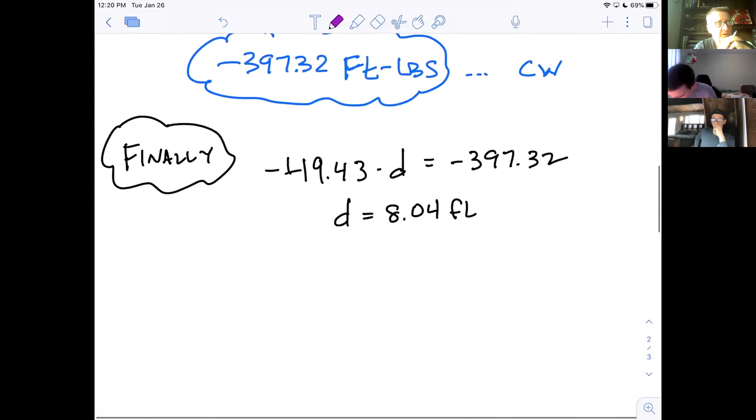So I know where it's located. And then isn't this cool too? Like let's even do one more thing. If it's right...

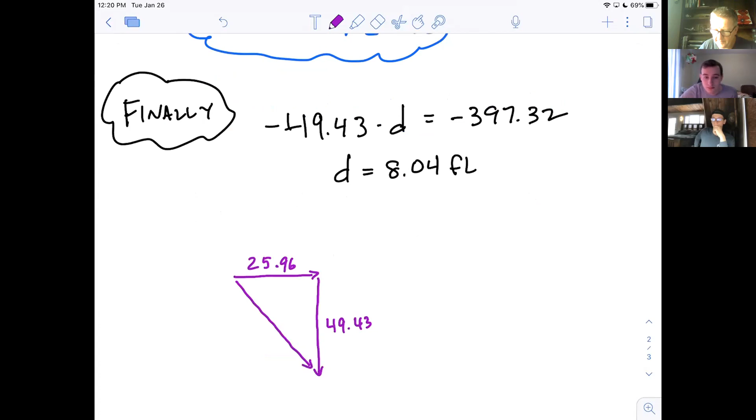25.96, and as it turns out, down 49.43, couldn't I then calculate the resultant kind of vector from that, like as a magnitude?

Again, you tend to not need to do this. It's kind of nice just to have them as 25 and 49. But if I wanted to find this angle right here, couldn't I do it? And if I actually wanted to find the resultant force, couldn't I actually do that, the magnitude of that resultant force?

Because of the picture, notice because of the picture, I didn't have to call 49 negative, like I drew it in here as downward. So when I did that, I got 55.8 approximately.

And then of course, theta would be equal to the inverse tangent of opposite divided by adjacent. So theta, inverse tangent of 49.43 divided by 25.96 is 62.29 degrees, or 62.3 degrees.

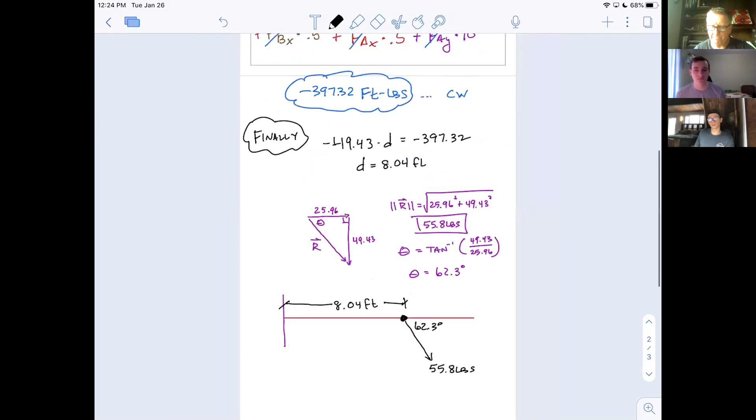You able to track with all that? Do you feel like that's a lot of calculations to make, but thankfully it's not 3D, so I don't have to rely on mnemonic devices and determinants to figure out these rotations. I can just see them in action.

So I have a quick question. Go ahead. Because now you know the distance, the angle, and the force, so we just need to go find a strong enough post or whatever and place it at that distance at that angle, right? That'd be ideal. Yeah, okay, now it doesn't mean you have to do it that way, but it'd be ideal. Nice job.

And the cooler thing might be, let me erase this because it'll make a mess, but does it make sense that you could come back here and attach a cable in this direction back to the building? And notice I knew exactly what angle to attach it at, and I just have to make sure the cable won't snap with 55 pounds on it, right? So I can't use string, I've got to use something at least reasonably strong.

And it's pulling in the perfect direction to stop that from happening, so effectively the arrow that I draw on this is going to stop the rotation. Do you agree with that? It's going to stop the rotation because it's pulling exactly the opposite direction at exactly the same point. So this is also going to be 55.8 pounds, right? So it stops everything. It stops vertical, stops horizontal, stops rotation.

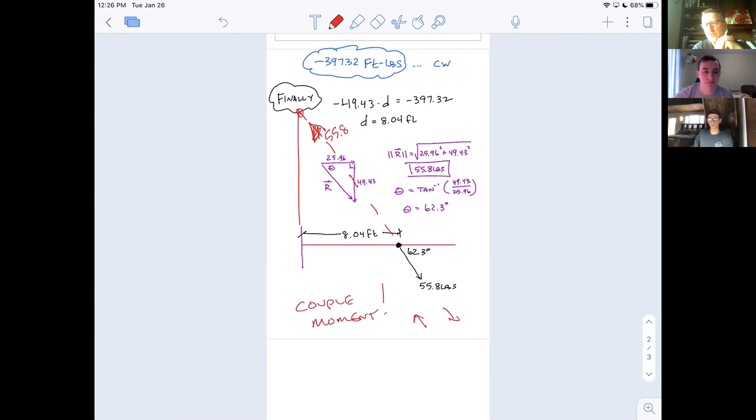Then in real life, you'd have to make it stronger to correct for snow, whatever other forces you had. So what I want to do with this tomorrow is actually show you some of those real forces, because this problem and all the ones in your book are so contrived. Like, what is that, a 40-pound bird that landed on there?

Does it make sense the 40 pounds could be the weight of the beam? Doesn't the beam have weight? The only problem with that is notice it's not in the middle. If that was the weight of the beam, wouldn't it have to be acting— actually, it is in the middle. Never mind, I lied, isn't it right in the middle of the beam? It's 6 feet on the left and 6 feet on the right, so it's right in the middle. So that 40 could be the weight of the beam itself.

What could that 60 be? Well, I guess like in that cantilevered house example, remember that pipe that was kind of pushing up from the bottom? Like that could be part of your solution. In this case, it's not part of the solution, but it could be.

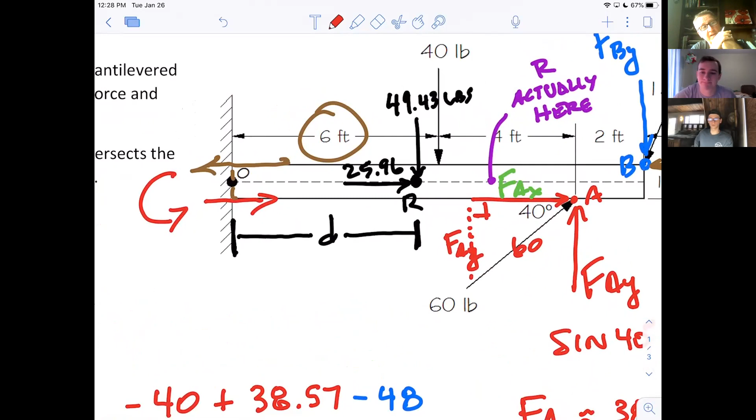What's that 55.8 pounds out there? Now it's acting at a weird angle that makes no sense, but does it make sense that could be the people walking on it, or it could be the snow? Because there are what's called in engineering live loads. Live loads are, well, they're alive, they move around. So snow is a live load, it comes and goes. So you do have to design it to be strong enough that if it snows a foot deep on it, then that cable still doesn't snap. So that's what you're designing for, kind of worst case scenario.

Does it make sense that if the cable is capable of holding 55.8 pounds, as long as I have all the forces correct, it won't break? But if snow added a bunch more weight to it, then I just make the cable stronger, so that if it's pulled on harder, the cable still doesn't break. So it's not as though the cable is always pulling 55.8 pounds, it just means it's capable of resisting it. You see what I'm saying?

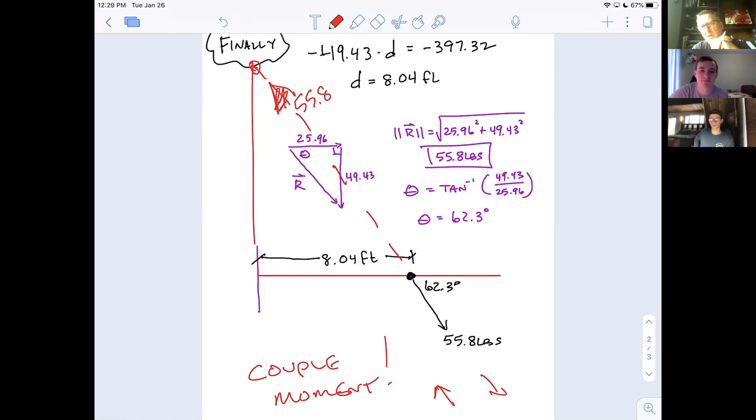So we'll get around to this a little bit tomorrow because I want to expand your understanding more. There's a thing called live load - comes and goes, people, snow and so forth. But there's also dead load. Dead load would be the beam itself because it's not changing. It's dead, it stays there. It's always 40 pounds and so forth.

All right, I think I should let you go think. So you should be able to finish the 4.5 questions now. I only did one example though, so that doesn't necessarily mean you have everything figured out, but that might help you finish that section. And then you might want to start into 4.7 and 4.8. Actually, if you really understand this example I just gave, the 4.7 and 4.8 questions are now doable, but we're going to do some more examples tomorrow.

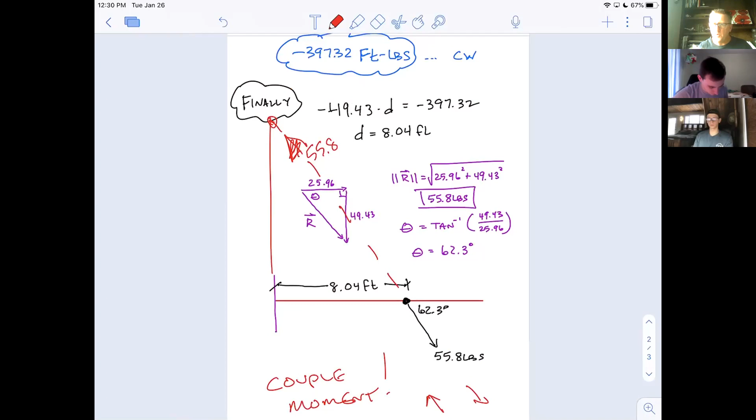So let's see, did I already download that? I'll show you real quickly what we're going to start off with tomorrow. This is the kind of questions you'll see in your book. So that one's straight from the book: replace the loading system acting on the post by an equivalent resultant force and couple moment at point A. So we're just going to practice a little bit more, and then we'll jump into the really cool example that I have prepared for you.

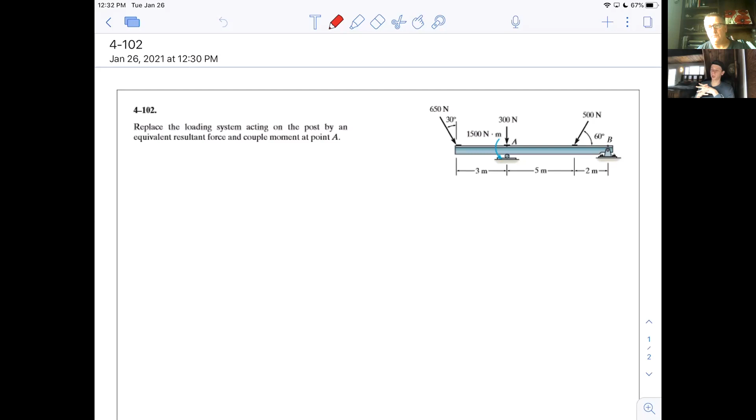So, and you saw the location - is it better to just put the whole support on the bottom, or have cables shooting up? Yeah, that's a good question. Let me...